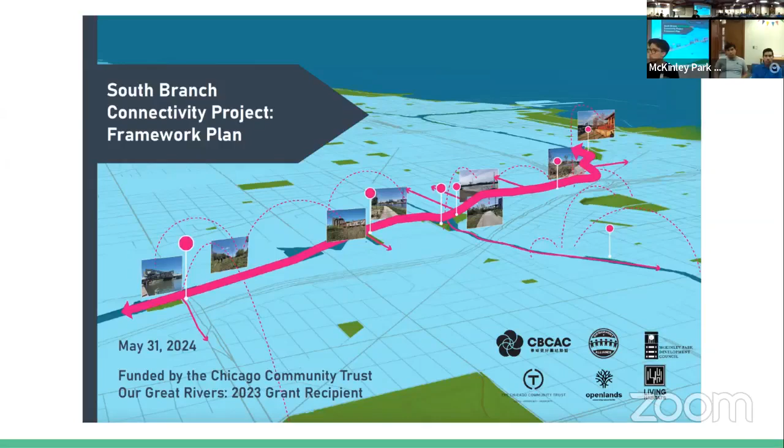So that's the goal. But in order to do that, what good is a path if nobody can get to it, right? And we all know that a lot of the streets that go to and from the river are not especially friendly for cyclists or pedestrians. So we want to take a look at those as we figure out how to get everybody from A to B.

So for the riverfront plan, this was our study area. And you can see here, this is where the path will go, right there along the river. The parts that are lime green are the parts that are already there, and you can see there's quite a few of them, but they're not connected and they're not contiguous. We would like to change that.

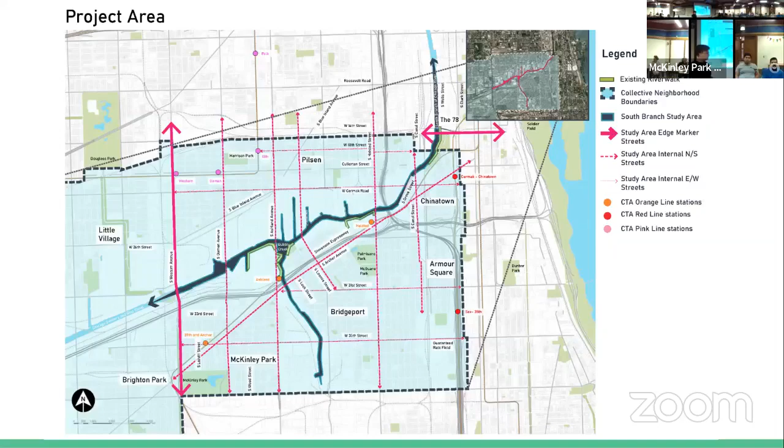And then these are some of the areas around them, some of those streets that would get us to and from, and also connect neighborhoods. Because by doing this, we're going to make it easier, for example, not just to get to downtown, but also to get from our neighborhood to Bridgeport or Chinatown or Pilsen. So we're hoping, bigger picture, to improve the infrastructure for things that are not cars, in order to make a better experience for everybody getting around the city.

So these are some of the highlights and some particular parts of the plan. And if you'd like to know more about the plan, you can look back on our Facebook page to see the video where we went over that plan in detail. We're also available to come talk to other community groups about it.

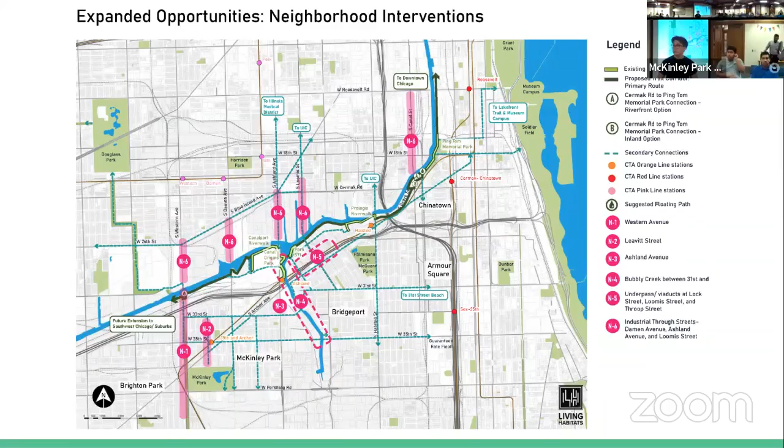So since we published that plan, now we have to go do things to make it happen, right? One of the things we're doing is we're working with the National Park Service on wayfinding. So wayfinding is part of what we're talking about tonight - figuring out how to get people from A to B. That can mean signage, but it can also mean figuring out what is the best way to get there, what is the safest way, what is the most comfortable way, and what is the most pleasant experience, and what needs to change in order to make all of those things happen. That's a big part of the work we're doing this year with the National Park Service.

And we are also talking about signs, making it clear where to go, giving information about the things that you might see as recreation and opportunities, and the acknowledgement of our significant history on the riverfront comes to the forefront. We want to make space for all of those things to be acknowledged and celebrated. We also want to work on programming on the riverfront to include all of our language groups in the neighborhood.

And also the Park Service is helping us with some mapping. So tonight you will use their maps, and we're really grateful for that, because that's a lot of behind the scenes detailed stuff.

Sorry, so sorry, it's my birthday. Well, happy birthday.

So tonight we're going to start a walk audit, and we're going to be doing this every Wednesday for the next several weeks. So first off, like, what is that, right? All right, so that's what we're going to be doing tonight.

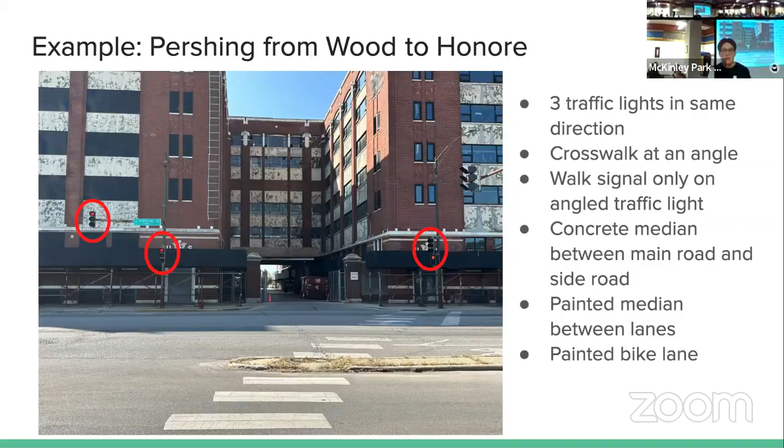Yeah. All right, so please, you want us to walk down 35th Street and look at crosswalks and see how. We're gonna give you blocks, and I'm about to show you the app so you can see all the questions.

Okay, so this is the map that the National Park Service made for us, and it's a little bit covered up. Thanks, Delilah. Come on, all right, there you go. Made for us—so you'll notice this map includes McKinley Park, Pilsen, Bridgeport, Chinatown, and Armour Square.

So these darker lines are the blocks we're gonna walk. That's why we're doing this over six weeks, because it's gonna take a while to do all that. So when we leave tonight, on the way out the door, we're gonna assign everybody probably two blocks to go walk and try it out. And then we'll meet up back in front of the library for any debrief questions. But this is what the big picture looks like, what we're trying to capture.

We're also interested if anybody knows other organizations or school groups that might be interested in doing part of this—we'd love to bring more people on board. In Chinatown we're lucky, the Chinatown ambassadors are gonna be doing it on the clock, which is really helpful. But for the other neighborhoods, we don't have anything like that.

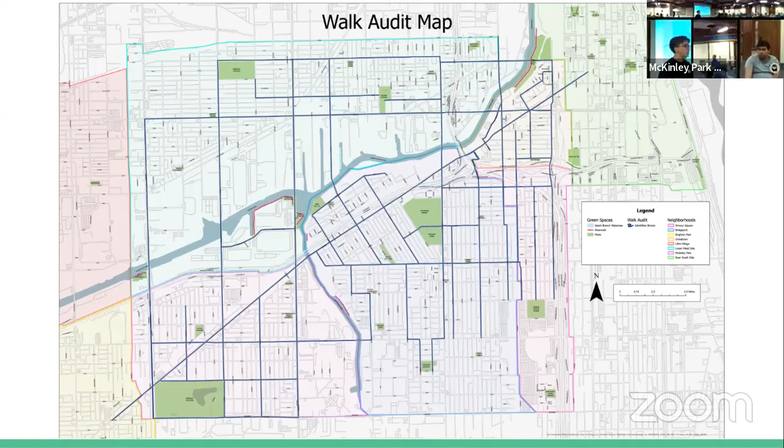Is this something we're expected to meet back every Wednesday? I mean, everybody can come when they can, it's free form. We're recording the instructions tonight so we don't have to repeat them every time. And the other times, we'll just meet on a corner and then go walk. Yeah, because I know I'm not free the next two weeks. You're here tonight, thank you.

Can people just be assigned asynchronously particular blocks to walk, like can people just sign up? Yes, so the way that's gonna work is we're loading all the blocks in the app, and you can choose to go walk any block you choose. Every couple of days we're gonna go through and pull out the ones that have been walked, so the list will get smaller as time goes on. Unfortunately we weren't able to automate that. But yes, you can absolutely—and actually please, if you're so inclined, take your dog for a walk and document a couple blocks, that would be great.

All right, so I want to go over some terminology of things that we're looking for while we're out. Most of these examples were from Chicago, not all of them, but here are some things to go over for definitions.

So this is the same place on Pershing I showed you. This is like a concrete median. And then bump outs are where you get to the corner and there's about a car width where the sidewalk extends longer at the corner, like on Ashland. Ashland and Pershing is a really good example, for the bus stop there. That's a safety feature because it shortens the distance a pedestrian has to walk across the street, and that actually reduces pedestrian accidents.

So people make a right turn and don't look for pedestrians crossing, right? Yep, that too. I see bicyclists get hit from that too.

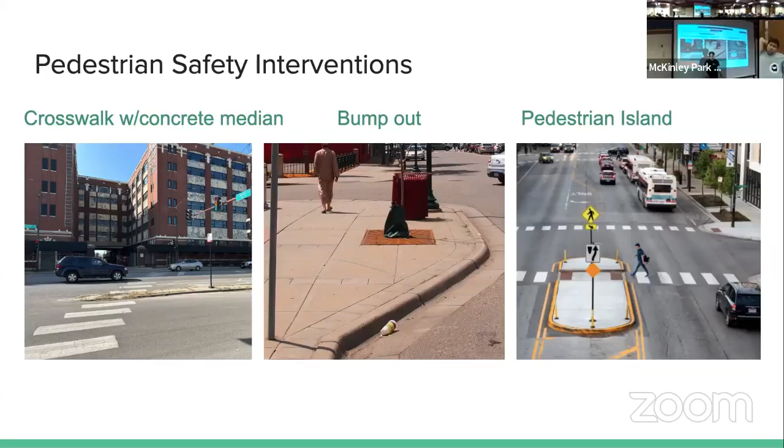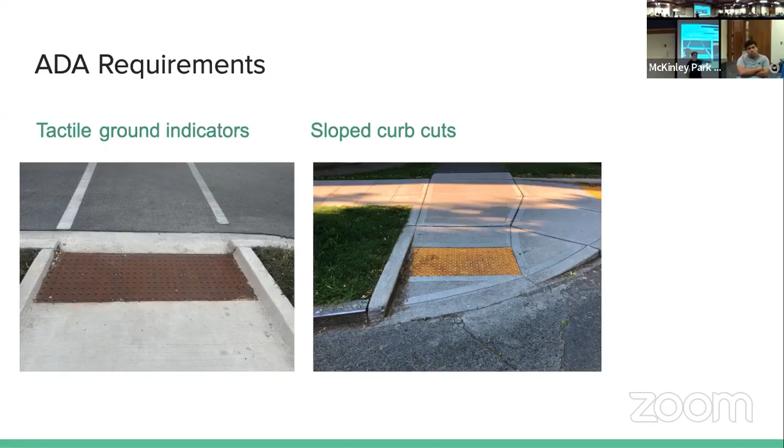Pedestrian island. And then we're also looking at accessibility for people with limited mobility and other issues. So these tactile ground indicators are especially helpful for people with vision disabilities because you can feel the texture there, so you know that's the end of the curb. And then these sloped cuts, of course, help anybody who uses a mobility device or just doesn't move too quickly, to ease down into the curb.

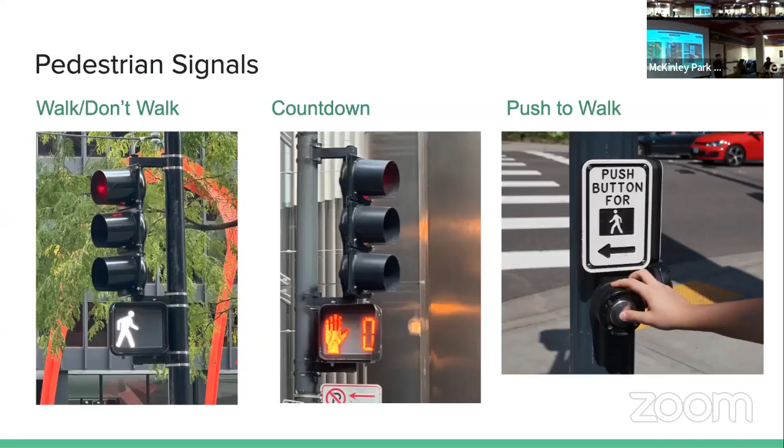And then in a couple of places on our path there are these push button signals, and we want to document where those are as well. To the best of my knowledge, there's one on Halsted and two on Ashland. But those are put at places that aren't at an intersection, maybe where we exit to an industrial property, to allow pedestrians to cross there. In some of those places we might actually like to have regular traffic lights instead, because either they don't work or the cycle is very long and it makes it hard to cross the street, especially next to the L station. Both of them are next to L stations, and people need to get on the street.

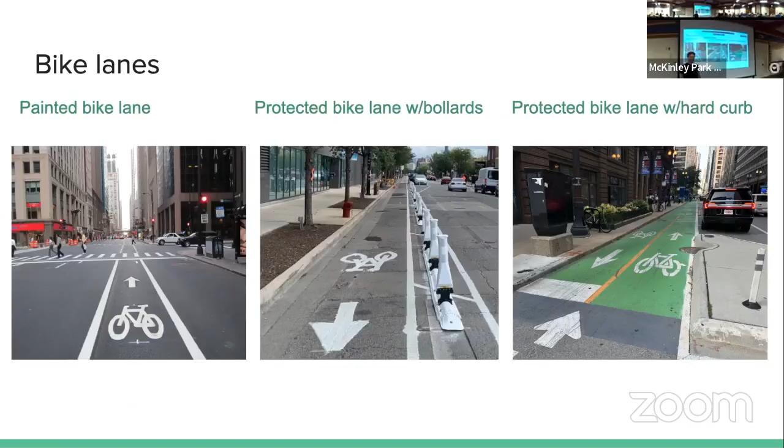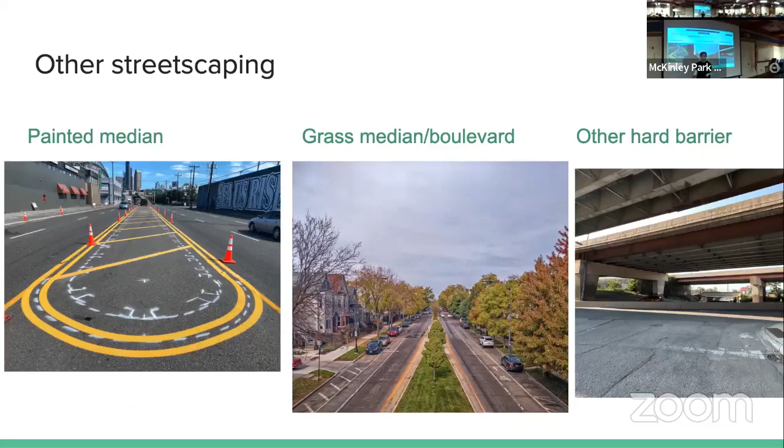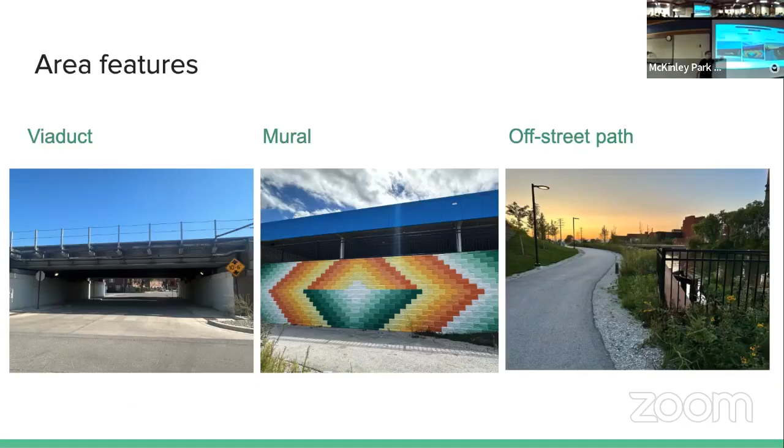And then there are some positive features. We do have, some of them are positive, murals. This is the off-street path behind the Ashland Orange Line at Cal Logics. And viaducts, some are better than others. This is a really, really clean one in Bridgeport, next to the IUOE Union Hall.

And I want to point out too, this list of features, there's a link in the form that you're going to see. So if you're like, I don't remember where that thing is, you can click and watch all of these pictures again.

Just to be clear, the audience for all of this data will be the McKinley Park Development Council, in order to help choose and encourage other city agencies to identify and prioritize the best routes to the future lakefront path. That's one purpose. We will probably end up sharing this with city and state transportation agencies, also the planning department.